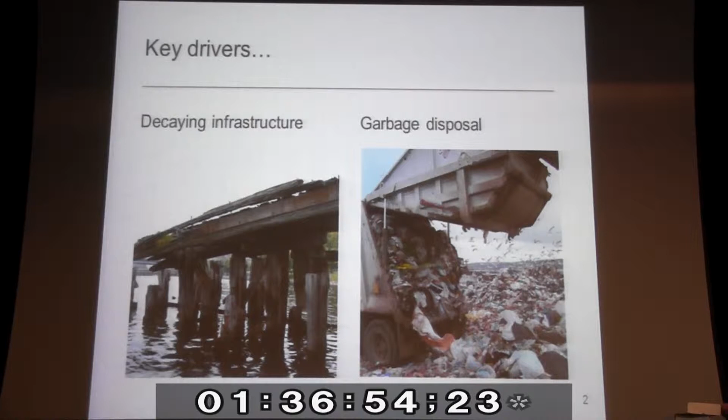On top of that, the population has made it to 7 billion now. Roughly 10% of that 7 billion doesn't have a place to live. So roughly twice the population of the United States doesn't have a home. And the countries that are modernizing, they're looking to do the same thing we did. They see it as their turn to modernize their society. Problem is they're not using sustainable technologies to do that.

And that's going to affect us all, especially when you think of the rapid growth that China has made, the fact that they have such a large number of people in that country. They've gone from maybe 10 years ago accounting for maybe 20% of the concrete that's made in the world to basically accounting for half of all the concrete that's made, which, by the way, is probably going to hit close to 4 billion tons this year.

So one of the problems is there's a lot of nations that don't have the luxury of building infrastructure. They don't have a place to dump their garbage. They don't have a way of having access to concrete. And if they did, they might not have water to be able to even cure it. So with all these limitations in resources in many parts of the world, that is another issue that we have to deal with if people want to live a higher quality of life.

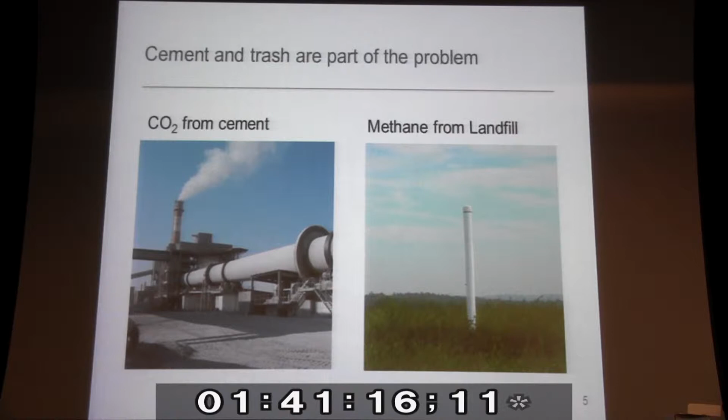So just think about this whole problem as a little snowball rolling down the hill, getting up to a critical size where it can really do some damage. So we see this as part of the problem. That's one way you can look at this. But the other way you can look at this is say, hey, maybe we can turn this upside down and turn this into a solution.

So what I've done is figured out how to take cement and trash and turn it into a solution instead of a problem. So the idea here is take a low emissions carbonate cement. And this is the cement that Jackie alluded to. And I'll explain to you in a little bit what that actually is. And you mix the cement with aggregate and you make concrete, okay? The aggregate is the sand and the gravel.

Then you use this process called trash gasification, and we make CO2 and water. And that might sound funny. What do you want to make more CO2 for? You just told me I had a big problem, right? Well, I think making CO2 is much better than making methane, and that's what the garbage dumps do. So let's stop that. While we're at it, why don't we use the gasification process to create electricity, heat, and ash?

And the way that happens is the technology I'm going to show you makes what's called syngas, which is a mix of carbon monoxide and hydrogen. You mix it with air, you get a big exotherm. Turns out most diesel engines will actually run on syngas. Now, Exxon doesn't want you to know that, but you can, in fact, run a diesel engine just putting syngas through as opposed to some type of a liquid.

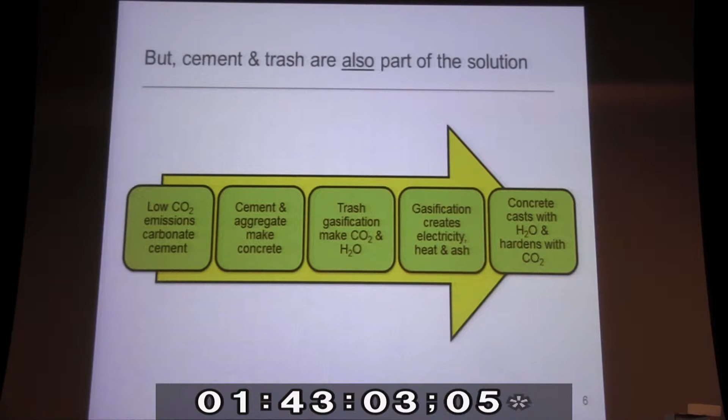And we have a little bit of ash left over, and the idea is take that ash that's left and put it back into the concrete. That's what we call aggregate. And so we use the water that's created from the trash to make concrete because we need to form it into a shape. But this time, the concrete hardens with CO2. We're not using a material anymore that uses water because cement wastes billions of gallons of water every year. It would be great if we could stop doing that.

So why don't we take it out of our trash? Because now you can go to the most arid region of the world and you can use that trash to create the water that you need either for this cement or even potable enough to drink.

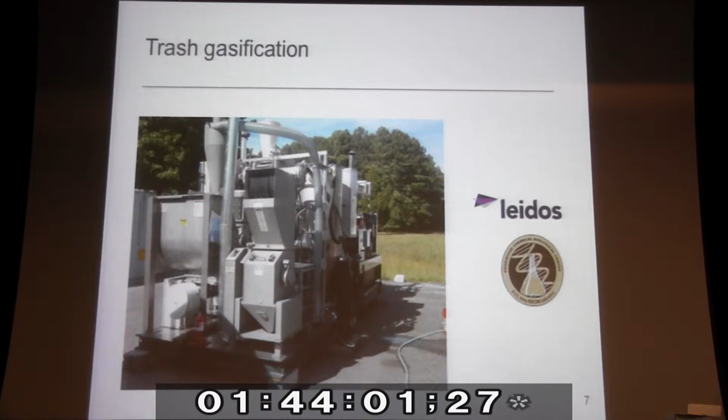So this is a machine that the Army likes to call Tiger. I didn't put any acronyms up here, but this machine can fit in my office. Now, I got to admit, I don't have a really small office, but I don't have a huge office either. This can fit in the back of a moving truck real easily and be lifted by a forklift. And this technology developed by the Army is now being commercialized by a company called Leidos.

Now, this machine I just showed you was used in Afghanistan successfully to power a base with 600 soldiers who generate roughly a ton a day of garbage. And that's just the trash that the soldiers generate. Lots and lots of plastic bottles, lots of paper, and lots of liquid. You know, there's uneaten food, there's what you drink and finish, all that stuff goes in here.

And this machine is able to put out syngas and power enough electricity to run an Army base with no other source of electricity. The reduction in solids is roughly 30-to-1. Like I said, what's left over we can throw into our concrete. And now we've gotten rid of the sanitation problem because we no longer have any waste. We don't have to throw it anywhere because there's nothing to throw. We conserve land and we conserve water.

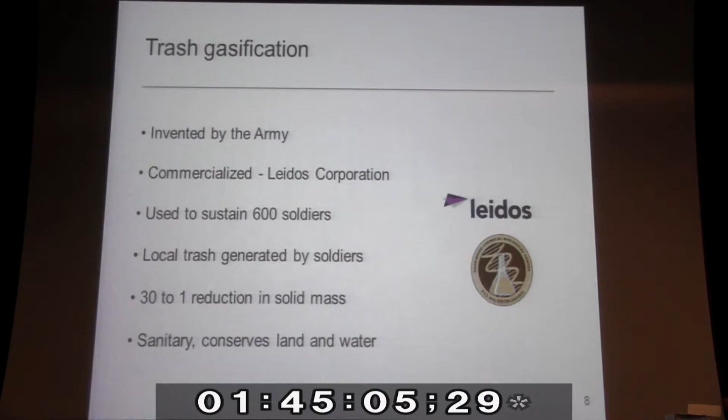But this is the actual concrete that I told you about that consumes CO2 and uses very little water, about 80% less water than cement, which is a really big number.

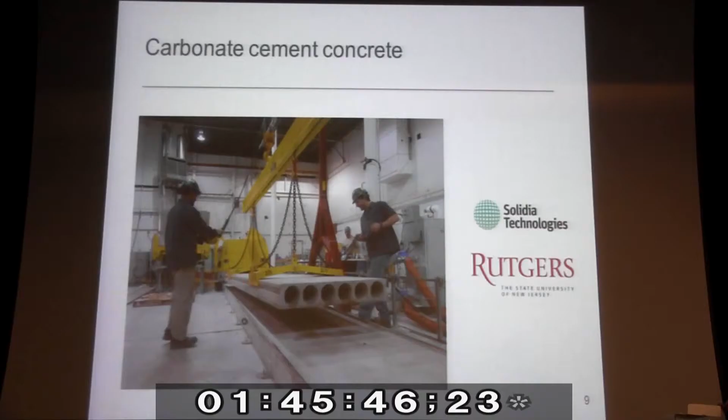So how do we do it? What's our secret? Well, we take good old limestone and react it with silica to make calcium silicate. This is one way to do it.

But guess what? For those third world nations and for those people that have encountered terrible disasters that have wiped out their communities, there are soils out there that you can react directly with CO2 to make it carbonate. For example, Afghanistan is loaded with it. And if you go to Mexico, there's plenty of it there as well.

And we've even taken modifications of this classic process for making cement and have managed to turn Piscataway mud into cement. We can take fly ash, all those billions of tons that are out there, and convert it. So when you take a look at this,

you see that it's a very simple reaction, but there's a big difference between what we do and what the cement industry does. We halve the amount of calcium carbonate that's in there, at least twice as low a concentration, and we lower the temperature 250 degrees C. Now, by doing that, we've just cut the energy bill and the CO2 emissions by 30%. That's an amazing number. And we've proven this.

We've gone out to a cement mill in the middle of Whitehall, Pennsylvania, a 107-year-old cement mill, and we gave them even greater energy savings than what we promised them. And there were no capital improvements. So the cement industry actually loves this idea. And it's a good idea when you have an idea if you can get big companies to participate, because then you can do things fast.

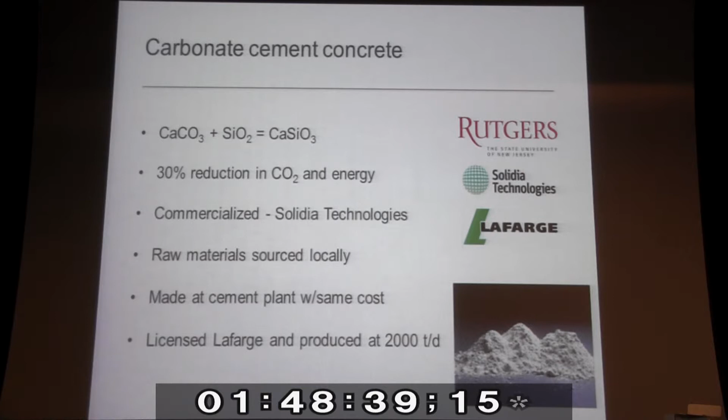Now, again, it's made at a cement mill and it doesn't cost more. And we've done 2,000 tons a day, which is a really good production rate. Now, the cement itself, I like to think of it as a breathing material. You can actually hear the material respire the CO2 in when you start the curing process. And you make basically calcium carbonate and silica. It's very similar to Portland cement concrete, except that we're using CO2 instead of water.

Again, local raw materials. We can go to an existing concrete plant nearby, and we can make a wide range of different materials. And that makes it very attractive to concrete manufacturers. So there's roughly 10,000 concrete businesses in the United States alone. And there's roughly 100 cement companies. So it's one of these things that we could turn around right away if we could get the government to pay attention.

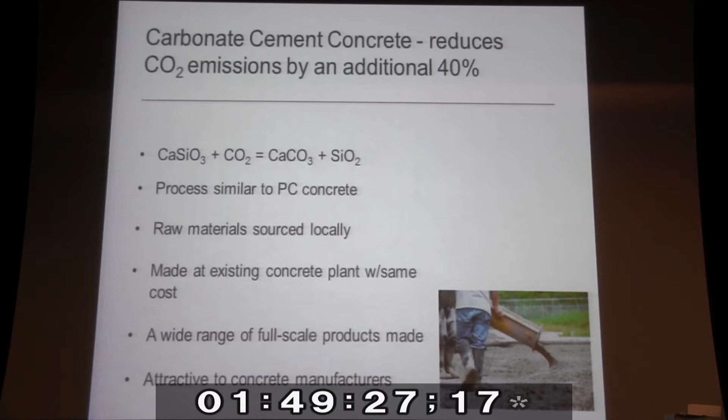So best yet, it has unbelievable properties. First of all, you can make a material in less than a day. 30 minutes is our record for full strength. No shrinkage, so the material doesn't crack like a lot of cements you see. The strength can be up to 4 times stronger than a conventional, ordinary Portland cement. It's much more abrasion resistant. It doesn't deform when you have a lot of weight on it. We call that creep. It can take bad weather, really bad, like today.

And the thing that you've never seen before in cement, you can throw all the sodium chloride on you want, it won't decompose. Different chemistry, that's why. And you won't see all those white spots leaking out of your wall, and we can reduce the CO2 emissions by 70%. So think of that. 4 billion tons of CO2. We can drop that by 70% just by switching over to a technology that doesn't require anybody to buy new equipment.

All right, switch for me.

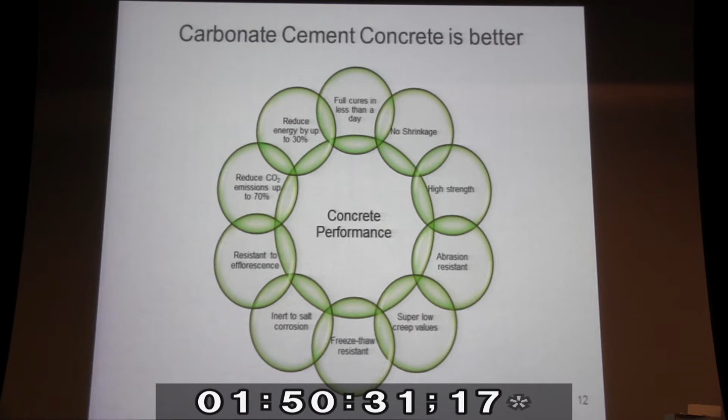So what we really want to imagine at this point is I want you to imagine a green toolbox, one of these shipping containers where we can put all the equipment we need to get people to gasify their trash and learn how to make infrastructure materials. And imagine having the capability to ship these all over the world, along with everything else that we ship, and allow communities to build themselves from nothing, allowing established countries to be able to change the way they make things. So it's an infrastructure kit. It can go anywhere.

So the impact, the numbers are really amazing. Now, I'm going to tell you right away, I assumed the best possible conditions with these numbers. But slash every one of my numbers by 10. Go ahead. They're still amazing. Okay? Enough CO2 to cover every piece of land mass on the Earth 3 feet deep. Go ahead. Cut me by 10. That's still an amazing number. Generate enough electricity to power half of the United States. Save enough energy to give every gas tank 2 fillings.

Save enough water to fill Lake Erie twice, and sparing a lot more of the earth so we can grow plants, just like Clark was talking about. So I think that even, like I said, even if you slash this by 10, the numbers are really compelling, and we're getting rid of trash. We didn't even list that.

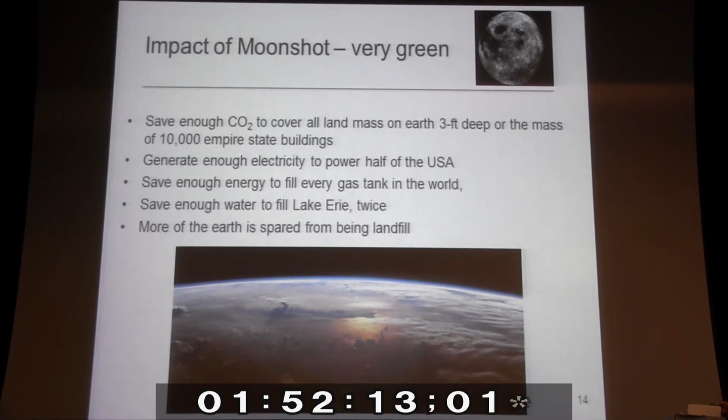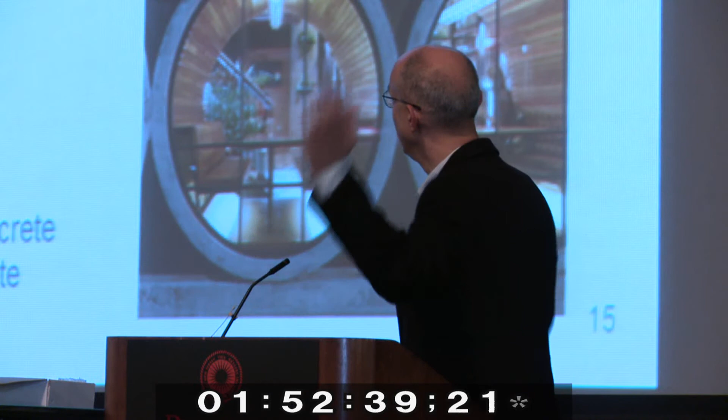So how are we going to do this? 3 steps. First of all, we want to establish the global cement supply, and we're in the process of doing that, but it costs a lot of money to be able to do something like this because nobody is going to build a road out of this material until the governments have tried making roads out of these materials. Well, the problem with the United States is they can't even pass a highway bill. So how the hell am I going to build a road? My company actually has to go to Europe to do this, or Canada. U.S. is like, closed for business. We have to get in a network of precast and cast-in-place concrete manufacturers. And that has to happen after this is done.

The other thing that we have, which is a big surprise, another cool invention done at Rutgers, is what we call a kiln-free cement. We now know how to make cement without using the kiln. Now, if I went and told all my cement friends that, they're not going to be too happy because they're going to start worrying about their rotary kilns and cement plants. But we can start beginning to deploy this in countries that don't have these kinds of plants and then kind of get them into it slowly.

Now, getting the trash gasified. Leidos needs to work on smaller, cheaper, more reliable, powerful, and automated machines. And you have to establish the supply chain. You just can't say, hey, go take the garbage out. And you have to be able to establish how you connect to the grid. So we need this, what we call an agile distributed grid. But now we don't have to put these big, powerful wires under the ground to generate our electricity in Alaska so we can get it in New York.

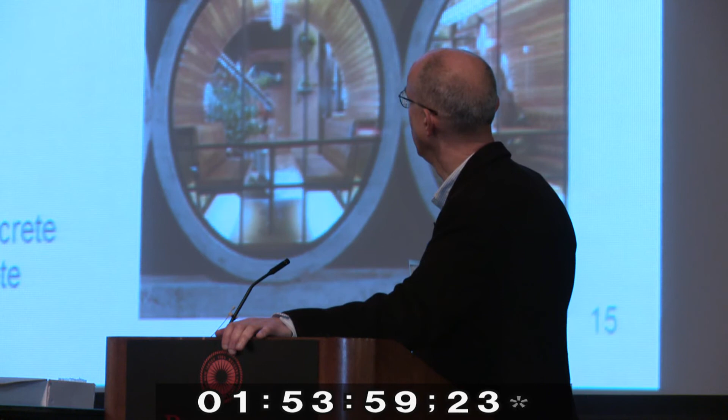And then we have to put everything together. We have to put this machine together with building the concrete, show we can make it for precast concrete, and show that we can also do it in a mobile process for putting roads in. So this is just a picture, by the way, of how we can take water pipes, which lots of countries actually need for fresh water, and make buildings. And this happens to be a restaurant made of water pipes.

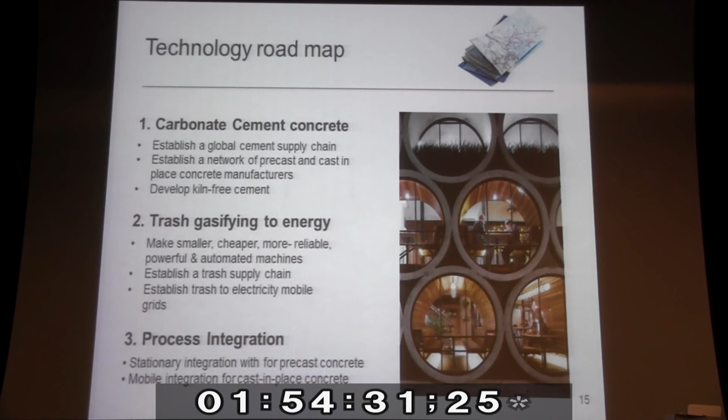So we can't do anything without a team. Every one of these people are important players, but we've basically got only enough money to fill our pockets halfway. We need to fill the pocket much more heavily in order to get something done. For example, NETL is in charge of CO2 utilization in the Department of Energy. They only get $1 million a year to do research in CO2 utilization. We need to have more like $100 million a year so people can think of more things to do with CO2 than burying it underground.

We're spending close to $2 billion to figure out how to bury it underground so in 10 years from now, they can bury as much CO2 as I'll be able to do in 6 years for probably about $30 million spent. We need to have more like $100 million a year so that people can think of more things to do with CO2 than burying it underground.